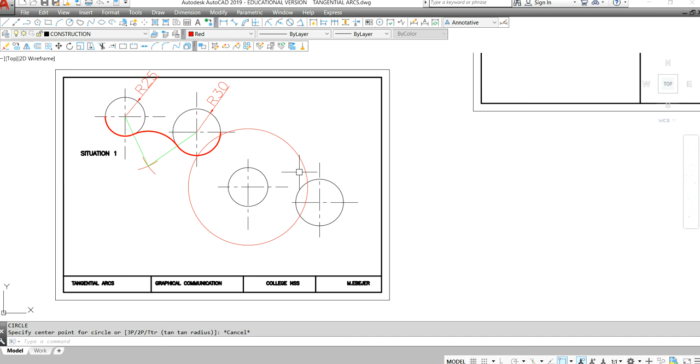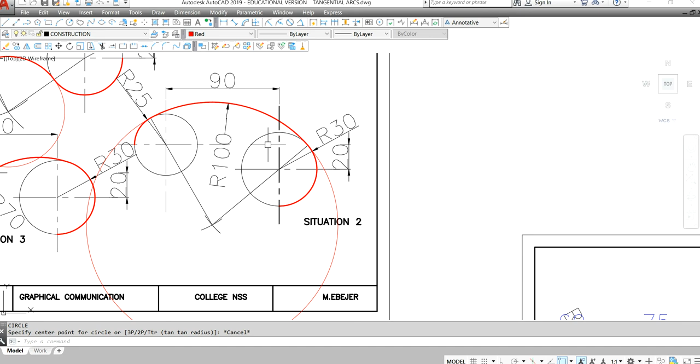Okay, we're gonna continue situation 2 where we left. Basically, what we were saying was that we need to do the radius 100. To obtain the center for the radius 100, we need to do subtraction. So 100 minus 25 gives us 75, and we already did an arc of 75, shown in red. Now the next step is 100 minus 30, which gives us 70.

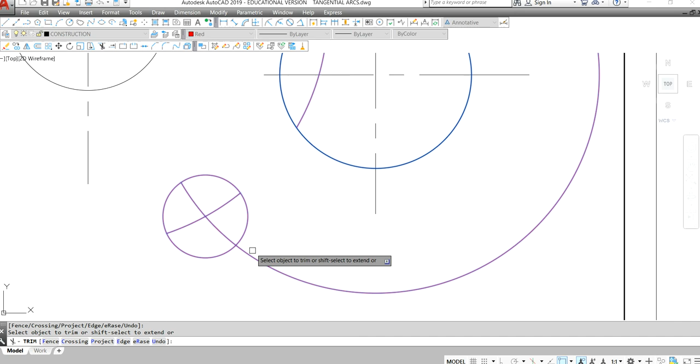From here, I'm going to open 70. Where the two arcs intersect this particular point, I'm going to remove the remaining. As I said, you're only going to do arcs with the compass, no need to do a full circle. So these two arcs intersecting over here means that is the center for the arc 100 I need to do.

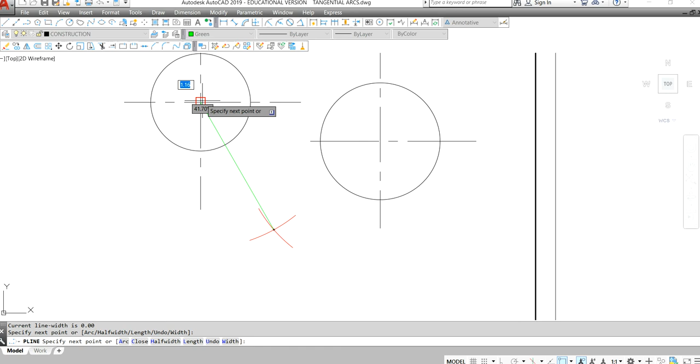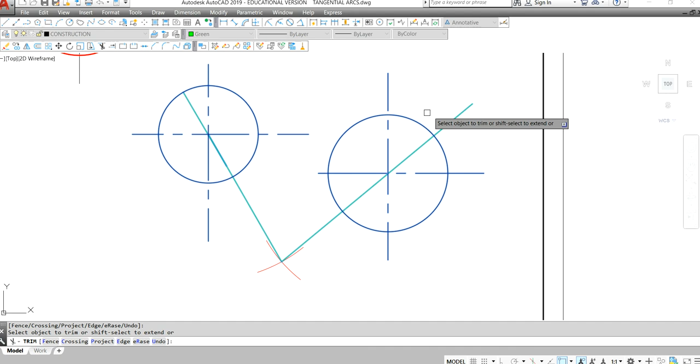Before I do the arc with the compass, I'm gonna draw a line as I did in situation 1, passing through the center, but this time the line continues to the outside. Even here a line passing through the center continues. These lines are called points of contact, which means the radius 100 I'm gonna do starts from here and ends there.

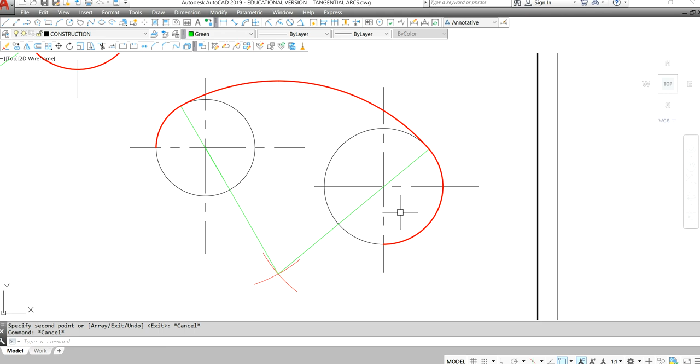With the compass, you're gonna draw the arc from here till there, that is radius 100. I can write the measurement over here, and then to make it more visible you can enhance part of the circle of 25 and part of the other circle of 30 to make it more smooth and realistic. Okay, so this is the second situation in this topic, which is subtraction.

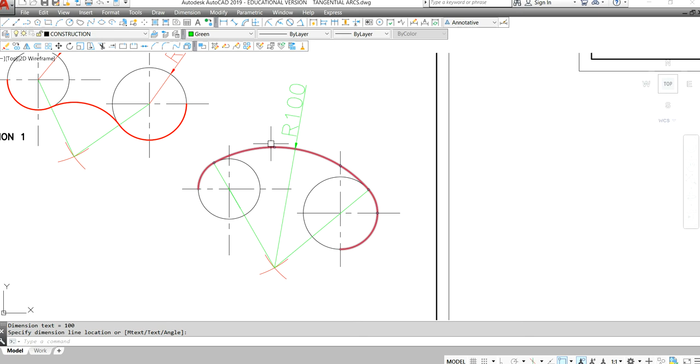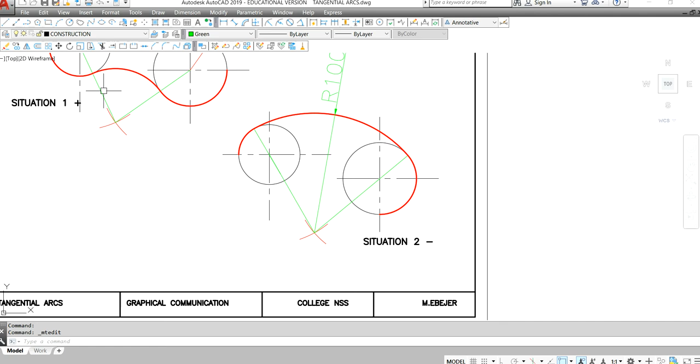So what we can do when you write situation 2, we can do the sign for the minus, subtraction. And situation 1 we can do the symbol for plus, which means this was done by doing addition. Okay, perfect.

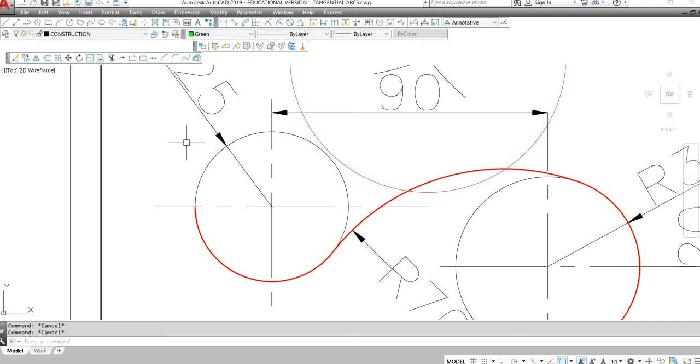Situation 3 is gonna be made up from both situations. So to start again, we're gonna draw two circles as we initially did. I'm gonna give you the measurements. Again, the circles are the small one 25 radius, the big one radius 30.

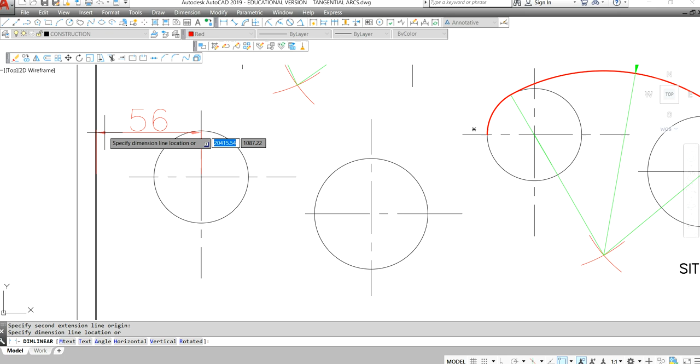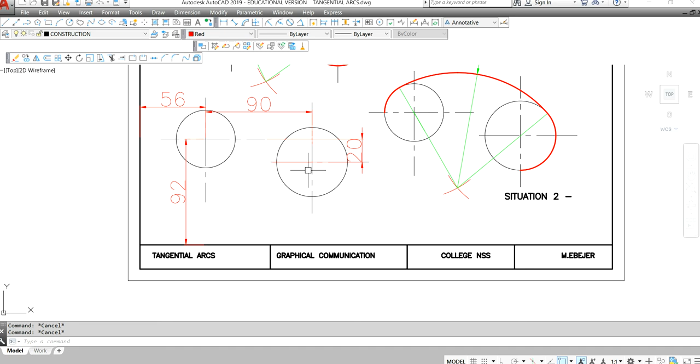Offset between one circle and another is 90 millimeter, and between the horizontal center line and the other horizontal is 20 millimeter. This particular center line is situated 55 or 56 millimeters away from the border, and this one is 92 millimeter, or even 90 is good. Again, we're gonna measure 90 millimeter and 20 millimeter offset. Okay, perfect. So these measurements are important to follow, so everything will fit in one A3 paper.

So the first one again, always 25, 30 radius, 90 and 20 millimeter offset. You're gonna start by measuring 56 and 92 millimeter from the title block, not from the border.

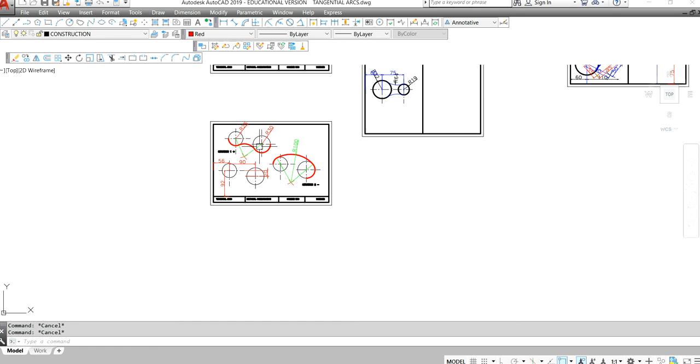Situation 3, we have this particular arc of 70. If I draw the full circle, you will notice that this big circle of 70 is touching the 25 from the outside, and is touching the radius of 30. The 30 is on the inside of the 70.

So to explain it better, the radius 25 is on the outside of the radius 70, and the radius 30 is on the inside. So if you understood the first two situations, the relation of the 70 and the 25 is addition, and the relation between the 70 and the 30 is subtraction. So how we're gonna do it?

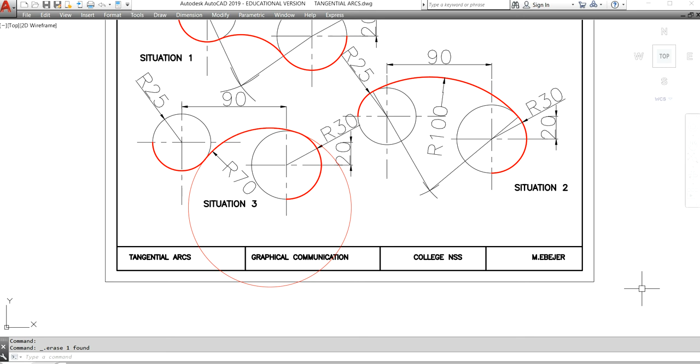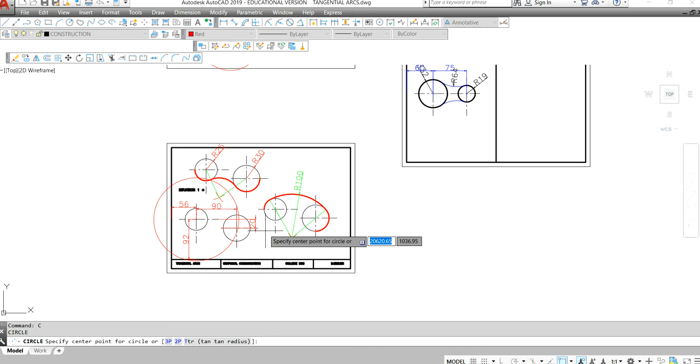First thing we're gonna do 70 plus 25, which gives us 95. So from the 25, I'm gonna open compass radius 95. The other one is subtraction, so 70 minus 30, which gives us 40. So from the 30, I'm gonna open radius 40.

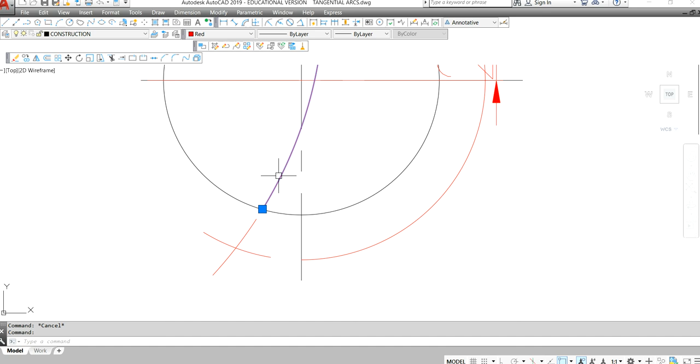Again, don't get confused with all these circles. All you need to do are these arcs where they intersect. So here we have the center for the radius 70. The center was found by doing addition with the radius 25 and subtraction with the radius 30.

Now again, as we did in the previous exercises, we're going to draw a line from the center to the center of circle 1, and from this circle to the center of the other circle. Here, this one we're going to extend it because the arc is going to pass from the outside.

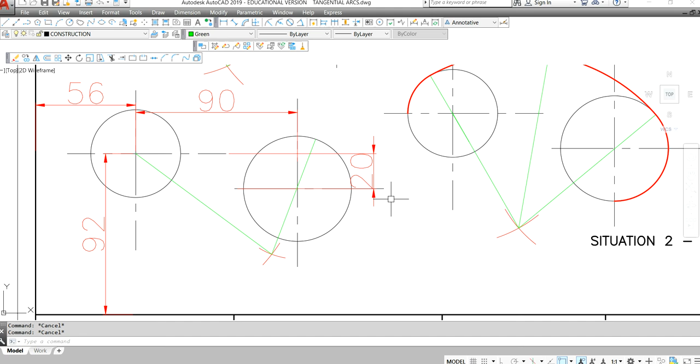Again, these lines, which I'm doing in green, in your case you're going to do them as construction lines, are called the points of contact, where it shows the 70, from where it starts and from where it ends.

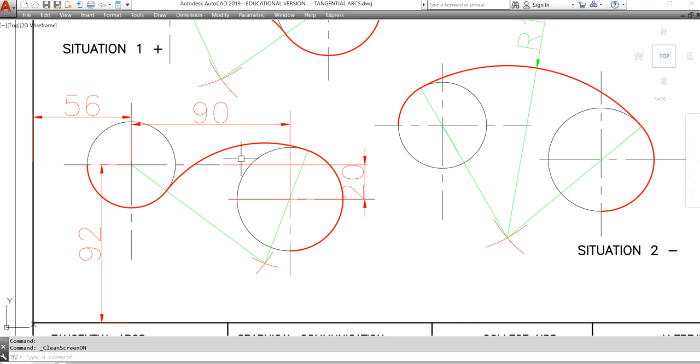When you have everything ready, you're going to open the compass 70. So from this point, from this center, you do from here till there. And then you can enhance the drawing as I did over here. You outline part of the radius 30 circle, and over here you enhance part of the radius 25 circle. And that's a situation where we use subtraction and addition.

Here we're going to write situation 3. I'm going to do addition and subtraction.

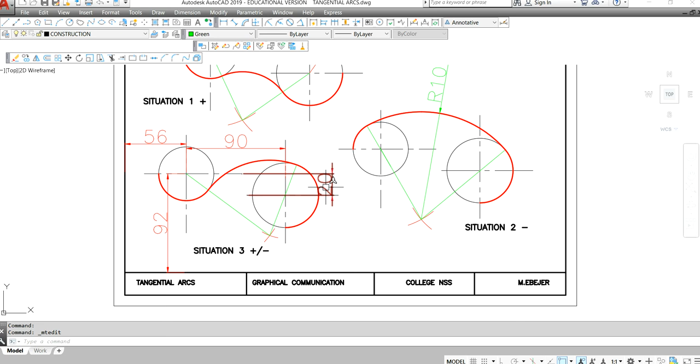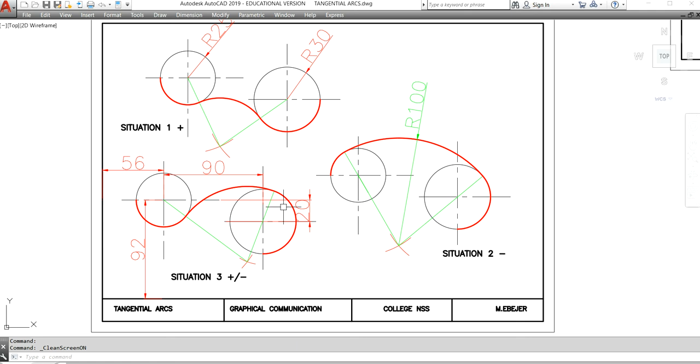So basically, these are the initial notes to understand the principle for this topic. Now in the next lessons, we're going to do some designs involving one or more situations from what we did in this section. Take time to design these notes because it's very, very important. Understand and design properly. Make sure the compass is well sharpened and you have a proper presentation. Thank you.